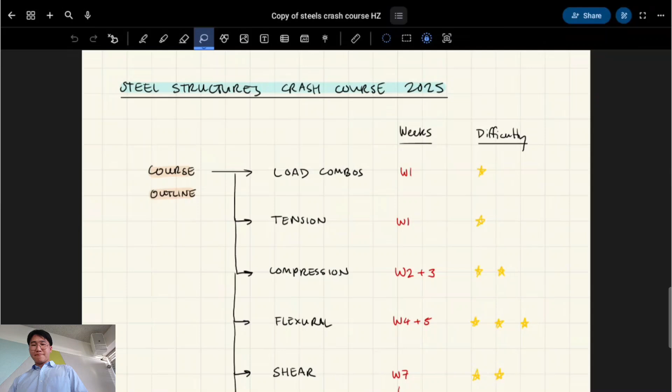So what tends to happen is you spend about half of the first week - oh hi Vina - doing load combos, which I assume most of you guys, since this is your first structural design course.

So structural design courses - steels and concrete - come in term 2. They generally come up in third year, but I convinced a couple of people to take concrete in second year, just because second year is filled with a lot of courses that are really abstract and don't really convince you that civil engineering is a fun degree. But trust me, these structural courses, once you do them - steels, concrete - you really start to get into them, at least if you're me or whatever. But hopefully I can convince you today.

So load combos - basically the point is, in Australia and New Zealand we use something called load combos, which we'll cover a little bit. How do I say it in a non-overcomplicated way - it's just a way of exaggerating forces and stuff you'll see in real life for worst case scenario design. There's something called strength design, so basically: how far can we push this building before it collapses? Essentially that's what load combos are about.

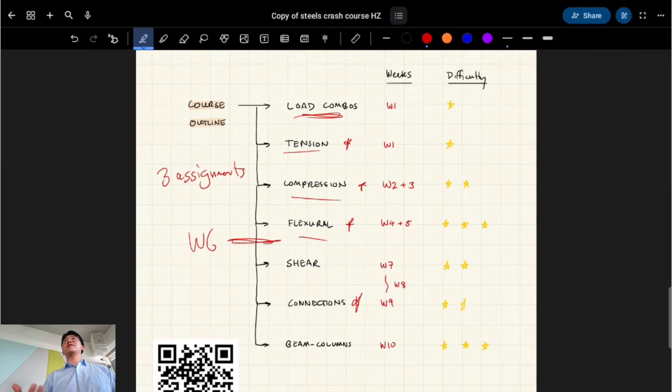Generally people do pretty well in the pre-exam stuff, which is the assignments. But once we get around to doing the final exam - Brian's final exam I heard was decently easy, but I feel like it's going to be a bit harder this year because final exams shouldn't be as easy as he made it last year.

Anyway, does anyone have any questions right off the bat?

Okay, if not, there are 2 bits of required reading for this course - 2 documents essentially. The first one's the Australian standards.

When you start reaching this part of your degree - actually, it's mainly just for the structural courses - we go off the Australian standards, or sometimes the Australian New Zealand standards, AS New Zealand 1170. There's decimal points, so there's 0 and 0.1.

This is basically everything to do with your loading. You won't really have to have a good look at these standards because they're just going to be covered really in depth in the lectures. Everything you need to know that's relevant to the course will be in the lectures for this.

But this is part of load combos and everything - this is where load combos come from. This is generic to all the materials, so even for concrete, you go back and use these.

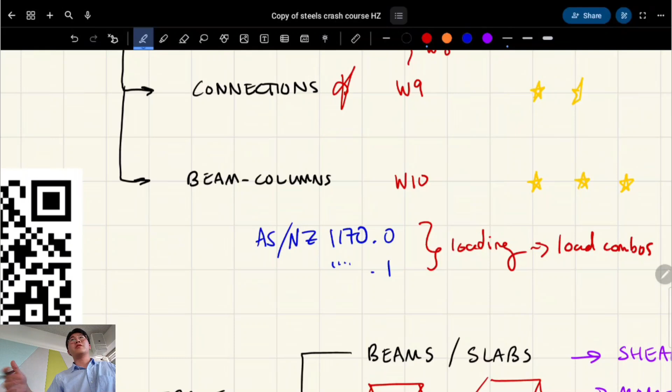The other one that's specific to steel is AS 4100, the steel structures standard for Australia, and that's what the whole course is based on. So everything else basically in this course you can find in this book - that's required reading essentially.

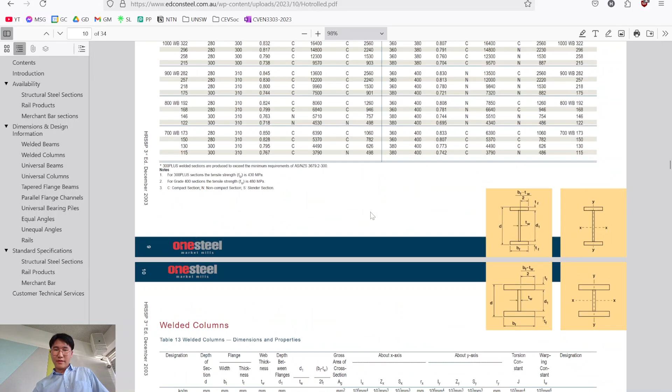Let's go to, this is a universal beam for example - it shows you on the top right what the product would look like, and has different sizes for the products. This looks confusing right now since it's your first time seeing it, but it's fairly easy to follow, and it'll save you so much time because you won't have to manually calculate every cross-sectional property. You just look at the catalog, find the number, and you're set. It has a bunch of stuff on here, it's really easy.

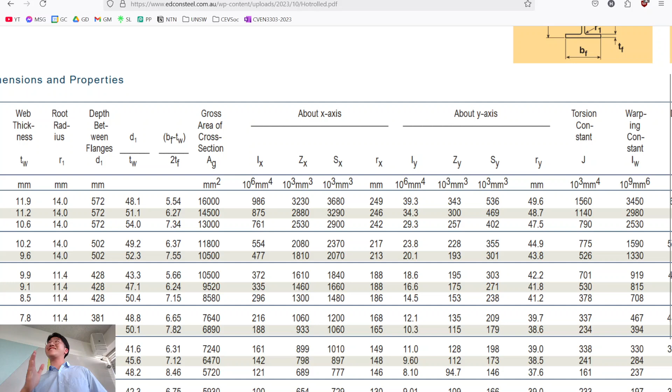Yeah, oh my computer's lagging. Oh no, I hope it doesn't crash or something. Is my recording still working? Oh boy, what the... it's kind of been... oh okay, no, it works. It works, let's go back to this. Oh man, okay give me a minute to fix this. Oh no, jokes, this way. Okay, come on man.

Okay, before we move on, does anyone else have any questions? That's just like the preface, you know. I've just gone over the preface so far.

Let's talk about structures. So essentially, there's a few different ways of thinking about structures. In uni, we learn about pretty idealized systems - we learn about frame systems and truss systems, essentially, right? This goes all the way back to like 1300, essentially.

Within a frame system, you can have 2D frames, you can have 3D frames. They're essentially the ones drawn kind of like this. You have pins - you can have rigid supports if you want, but you have rigid connections between the members generally, and actually the frames might look like this even. These are all rigidly connected unless there's a circle there and there's a pin. So it's things like that - that's like a frame, basically.

And then within the frame, you'll have different elements - you'll have beams, you'll have slabs, you'll have columns, you'll have walls. But we probably won't talk about slabs or walls at all in this course. You'll talk about it a little bit, like slabs specifically in concrete, but we effectively just have to focus on the beams and columns, so we're just thinking of those as one-dimensional kind of members or elements. When you start thinking about slabs and walls, they're two-dimensional, essentially.

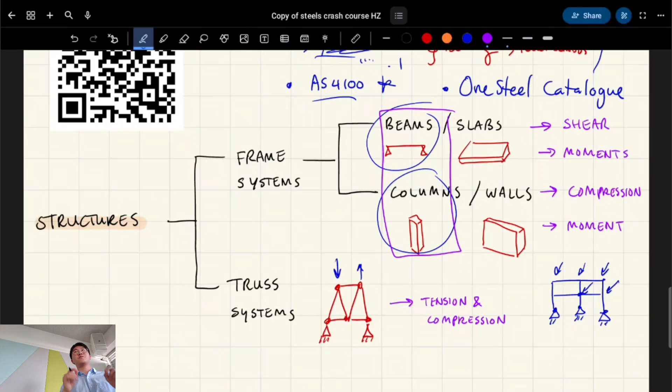For example, my elbow is a pinned joint - it can essentially rotate, so it's like connecting these two members and then it's free to rotate like that. That's pinned, essentially. So trusses have to be pinned - I've drawn them as circles here. They have to be pinned at every node, essentially, including the support. So you can't have a rigid connection for a truss - that doesn't work. And the idea is that trusses, ideally, you want them to only take on axial tension and compression.

Tension is when you pull something apart, right? Let me get this back - split it out. Yep, so tension is like this. Compression is squashing it together, essentially. I'll whip out the Play-Doh again later, because when we factor in material properties and stuff, there's a lot of nuances to these seemingly simple forces. So that's tension, and compression is going inwards, like that.

So you'll find that in truss elements, essentially, because of the way that the loads go onto the nodes, and then the nodes are pinned, essentially. Okay, does anyone have any questions right now? With frame systems, I should have mentioned here, sorry.

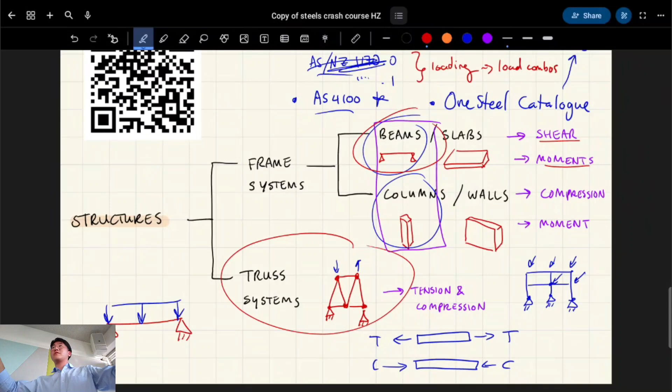Does that give you guys a good overview of what's going on? Let me know if I'm going too slow. I can speed up if you guys already know this, or slow down if I'm going too fast.

So like Henry, shut the fuck up. Get on with it. All right.

So if we have 3 tradies, and say they weigh 100 kilos each - quite heavy - if our structure, the scaffolding, can only support 300 kilograms, do you think that's going to be an issue? Yeah? Why is that? Perfect, so that's what this expression is about.

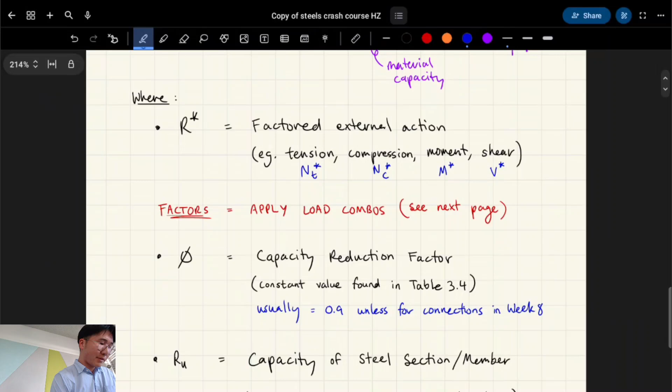There's a bunch of notation you're going to see in this course, so get familiar with it. R is kind of a generic expression - you don't see it too much in this course, but when I say R it could mean all kinds of letters: NT, NC, M, or V.

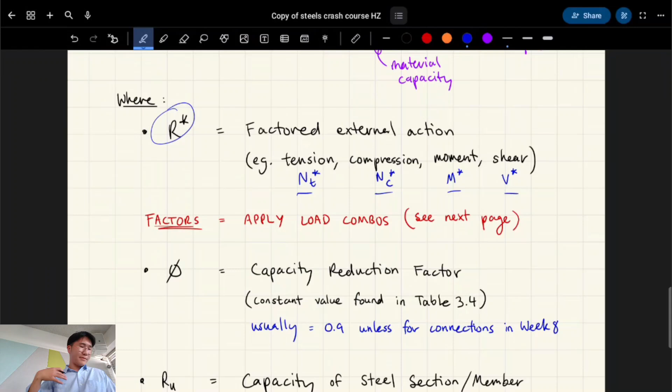Yeah, so anyway, there's a bunch of letters there for tension, compression, moment, shear, whatever. Yeah, I've explained that, okay.

So in this course, generally you're going to find two types of questions presented to you. The first one is about whether the capacity equation is satisfied, which means is the left-hand side, the external loads, less than the right-hand side, which is the material capacity. That's the first type of question. It's a simple yes/no question, like a true/false kind of thing.

In order to prove this, you have to prove the left-hand side. So you do all your load factors, which I just ran over, and then you also do the right-hand side. The right-hand side is a lot more complicated than it looks, because that's where all the steps come from. That's basically the entirety of AS 4100, the steel standards. It's about telling you what RU is based on the type of thing you're designing for, like tension, compression, moments, whatever.

That's the first type of question. So the second type, which is a bit more nuanced, is about iterations. It's based on the loading which I'm giving you - how big does my section need to be? When I say section, I'm talking about the cross section of a steel beam. How big does that section have to be in order to resist the loads? Like what's the smallest section I can get away with?

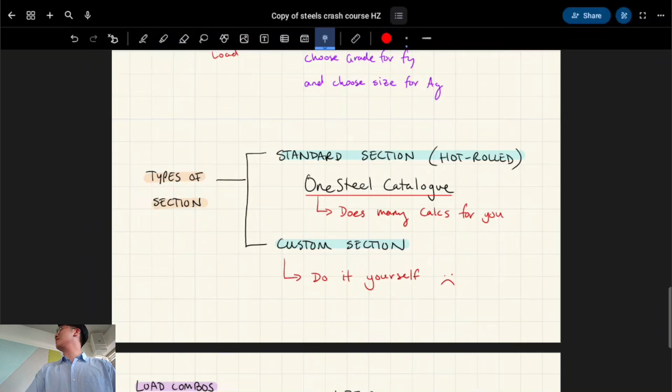So it's things like the second moment of area, elastic section modulus, plastic section modulus. If these words don't even sound like words to you, that's okay - we can go along, and you can always ask me questions even after the workshop. But yeah, custom sections are harder, they take longer, and you're not really expected to do custom sections in your finals because it takes too long, unless you're me, because in my year... anyway, sorry, it's fucking hard, isn't it?

So, load combinations, right?

This might not mean anything to you right now, but this is what is in AS1170.1. I won't cover this too much because you're going to learn it as your first topic in your first week, and I think Brian will do a good job explaining it to you.

Essentially, the thing you have to get familiar with is that we start talking about loads a little bit differently now that we're doing steel and concrete and real life design subjects. So G is known as your dead load, and Q is known as your live load. You also see other ones, like W for wind load. But more commonly it's just dead and live load.

The idea is that dead loads are things which aren't going to be moved for like 100 years, essentially - they're called permanent loads. Live loads are things which would move over the course of a day, a year, the shorter term loading. This is really important because, especially for serviceability, which isn't really covered in this course, how long something's been there makes a big difference on the deflection of the structure - how much it's going to sag over time.

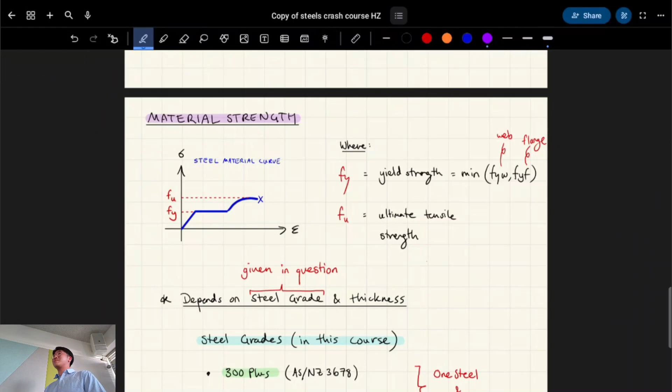Okay, so we need to start talking about material properties, because so far we've just been talking about the left-hand side - so load combos and everything is just the left-hand side of this equation. It usually doesn't take as long as the right-hand side. So all we've done is exaggerated our forces that are going to be applied to our building or whatever. Now we're going to be talking about the right-hand side, and the first step in understanding that is material strength.

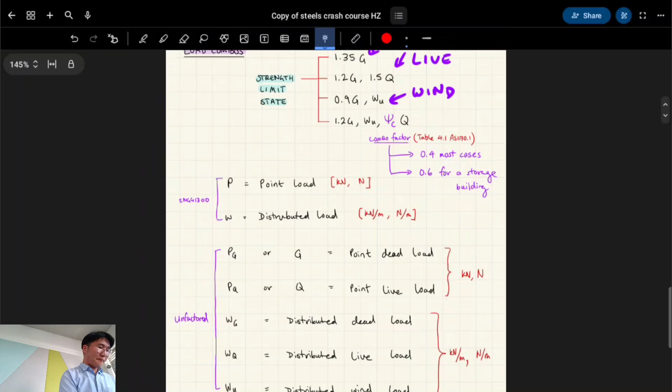Specifically, here's what it looks like for steel. These are your exaggeration factors, essentially, for your loads. There's a few different cases. 1.35G means that, in the first loading case, you just consider the dead loads - the things that are going to be there for 100 years - and then you add on 35% of it.

That's worst case scenario number one. Worst case scenario number two is we'll consider the dead and live loads acting together now. That's taking your dead loads again, exaggerating it by 20%, and then getting your live loads and exaggerating it by 50%. The reason why this is higher is because live loads can vary more.

For example, I think it was the Golden Gate Bridge or something - there was a day where everyone was celebrating its 50 years, and they all stood on the bridge. Fuck, you want the bridge to break or something? What are you doing? But that's an example of why live loads are more volatile, and so this loading case is exaggerated a bit more than the dead load only one.

So you check the worst case scenario between the two of them, and what you do is take the worst number, the maximum between those - and there's other ones to consider too. So between all of the ones you should consider, check the worst case scenario essentially. Make sense?

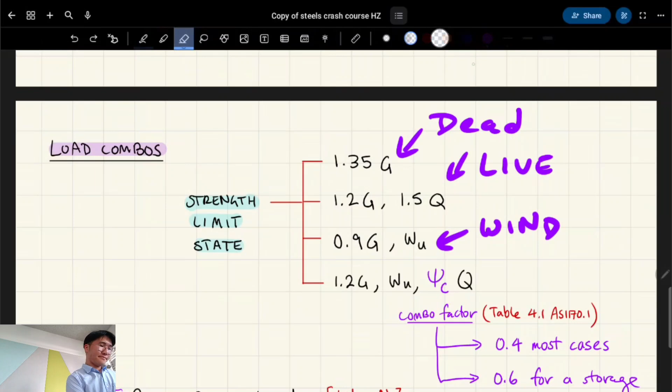Does anyone else have any questions?

All right, so we'll move on to the right-hand side now. That's capacity. The first step in understanding is material strength, and this is specifically for steel. So the good news about this course is you only have to think about one material. In the next course, concrete, you have to think about multiple, because concrete is reinforced with steel as well, so the interaction of those materials is really what does your head in.

But here we just have steel, and steel's going back to - have you guys done Material Science 1101? Yeah, some of you have, I think. Isn't it required now? I think maybe most of you guys have. Oh wait, one of them - oh yeah, because there might be some 4th years here, right? Is that right? Okay, yeah, okay, so I'm just trying to adjust how I explain this then.

Essentially, material curves you might have seen a little bit of in solid mechanics, but they become pretty important as you go along in structural courses. This is a stress-strain diagram, so stress on the y-axis, strain on the x-axis, and stress is essentially analogous to a force, and then strain is analogous to displacement. That's the very basics of it.

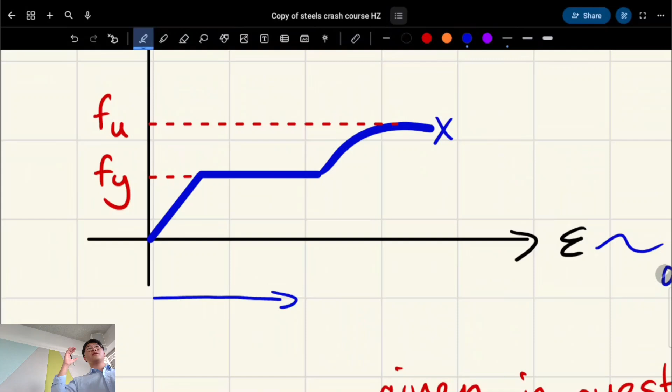So as you apply more force, you should think of it in terms of the x-axis. As you apply more displacement, there's this region that's linear at the start, and then it plateaus - it's not taking on any more force, essentially. And this is specifically for steel. So does anyone want to have a crack at why that happens?

I like it, okay let me repeat that. So this first stage, steel behaves elastically - this is the elastic region. That means, so if I had an elastic band or something and I'm stretching it and then I let go, it's going to return to the exact same shape that I started with, hence the name. So that's elastic behavior, where there's no permanent deformation, essentially. Steel does that for a little bit.

And then it plateaus - so why do you guys reckon it might plateau? What's happened in the steel? Because it goes into the plastic region, and then when you stretch more and more of it, it gets more plastic the more you go. Yes, there's a word I'm looking for - strain? Necking? Yeah, that's the result of it, but what's the steel doing? Yes, perfect - it's yielding. So that's the word we're using here.

Alright, this is the yield strength of steel. Play-Doh - why I have Play-Doh is because it's basically a perfectly plastic material. This deforms as soon as I put any forces on it, and permanently. So this is essentially what steel does: as you apply more strain to it, it starts necking, like you said, but we call this yielding. So yeah, anyway, does that kind of make sense?

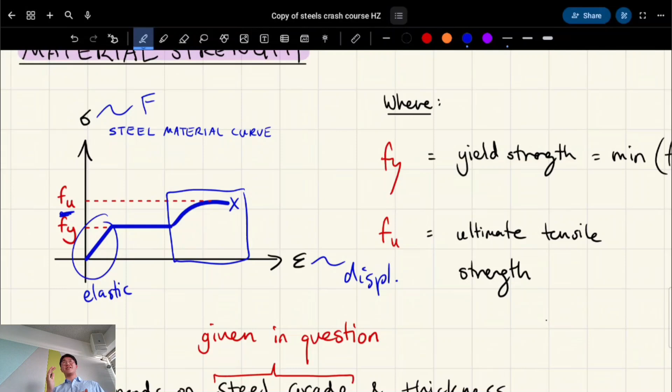So essentially, with metals, do you guys remember chemistry and stuff? If you haven't done material science, you have a metallic lattice, right? These little ions that are connected to each other, a sea of electrons, all that, right? So the idea is that, let's just talk about tension, as you pull these apart, they're going to dislocate. But then the dislocations start impeding on the other dislocations. And so they're actually resisting their own dislocating, if that makes sense.

But then there's eventually a point where it just breaks. It doesn't want to take any more, essentially. But this is called work hardening. And it happens in steel, aluminum, aluminium. Sorry, I don't know why I became American for a second. Okay, but yeah, does that kind of make sense?

And so you reach this point called FU, pardon my French, and that's the ultimate tensile strength. You only really talk about this property for the tension part of the course. Yeah. Most of the design in the course is based on the yielding failure. Yeah. So we'll talk about that a bit more later. Okay.

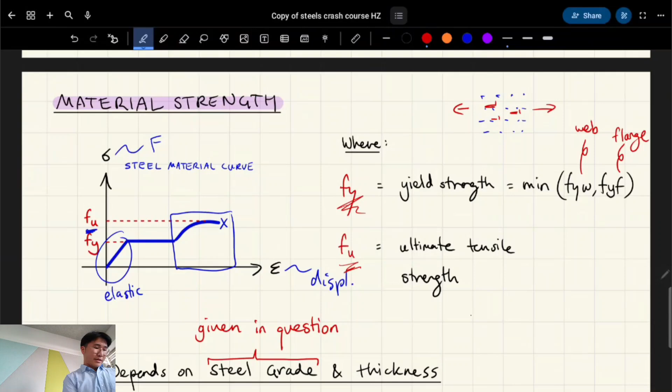Okay, so next, steel grades. So steel grades are essentially to do with how strong they are in terms of material strength, how expensive it is to produce, things like that, right? So there's a few grades you'll see in this course. 300 plus and grade 350 is what you'll see a lot in OneSteel and in the tables and stuff. So if it says we're designing a 300 plus steel section, whatever, it means that's what you should look at. So if the question gives you that, that's what you should be looking at in OneSteel.

Like you go to the column which says 300 plus. It's kind of hard to explain. It's like going back to the Lego analogy for OneSteel, right? It's like, okay, the Legos are 300 plus, and then the Lego off brands, that's like grade 350 or something. I don't know. Basically, they're slightly different, essentially. They have different properties. Make sense?

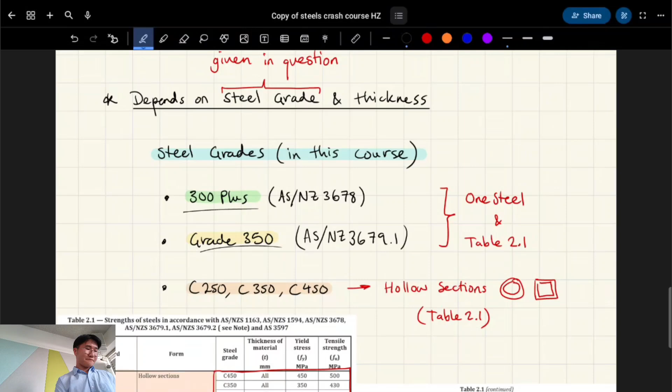Yeah. And then also there's a separate grading system for hollow sections. When I say hollow sections, we're talking about pipe shapes, right? So hollow circular sections, hollow square sections, things like that, rectangular sections. Yeah, they have a different grading system. Yeah, you can look at this in more detail later.

Okay, tension design. Sorry, we're finally here. This is the first week's topic that isn't load combinations, but I'll give you all that background because it helps for when I'm just talking about this stuff, essentially, right? So left-hand side, this is essentially truss design because you're not really going to find tension in non-truss structures so much, right? So just for the tension members and trusses.

The left-hand side here is going to be external forces. So what generally happens is you're given a problem where either you're given just design for this much tensile strength, or you'll be given an actual truss. So you have to use all your truss methods, like method of sections, method of joints, solve it, and find the worst case scenario for tension, and then design the tension member around that, like how big the steel section should be or whatever, right? Kind of makes sense? Yeah.

Okay, but then the right-hand side is obviously where there's nuances. The capacity factor in this course is actually really easy. So if you've done concrete, capacity factor depends on so many things. It depends on the ductility of your reinforced concrete and things like that. In steels, it's super easy. It's 0.9 for almost everything except for connections and maybe shear. But 0.9, that's the number we reduce, like under-exaggerate our strength by. Make sense? Oh, capacity.

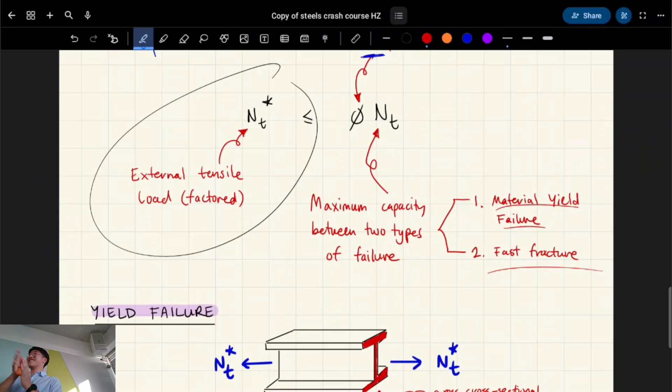Okay, I'll give you the answer. That's yield failure, we kind of understand that theoretically, right? Let's go to fast fracture.

If we have bolts running through our steel section, there's holes. Essentially there's going to be holes in our section because we need to use it to connect to another steel member. Why do you think the holes might cause fast fracture?

Yes, pretty much, so it's kind of to do with how - these will be kind of like the new cross sections. Do you see how it's a bit smaller than our old cross section? The same amount of force has to go through less cross section, right? And also it's partially to do with...

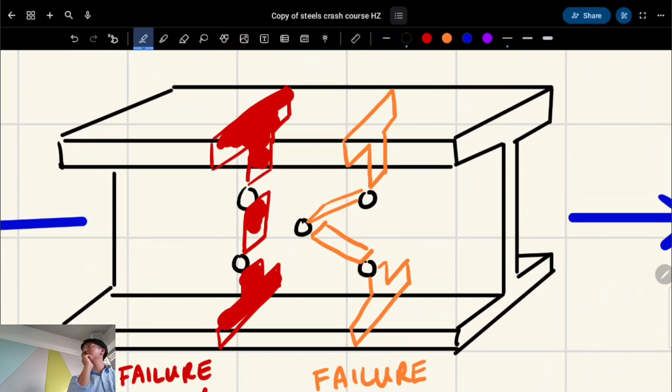Load, it's kind of like that - like how the loads are distributed within the cross section, because more loads will have to flow that way, and whatever. Do you know what I mean?

Yeah, I think in MATS1101 the very first experiment we do is a tensile test where there's a crack in our Perspex or whatever tensile specimen, and the idea is that it shows cracks will propagate fast fracture, right? So these are essentially cracks - the holes act like cracks and reduce the area and everything like that.

Okay, let's quickly have a look at the formulas involved. So for yield failure it's actually quite straightforward. Do you guys remember the general force equation? Sorry, I should say stress equation - what is stress?

Very good, so stress is force over area, right? What if we wanted to rearrange that for force? That's essentially what this is - let's do that.

So the force that we're calculating is going to be the product of your gross area. Gross area is area without holes, so it's the cross-sectional area, multiplied by yield strength. Yield strength is the limit of the stress which our section can take, so that's why we do F instead of sigma for the general stress expression.

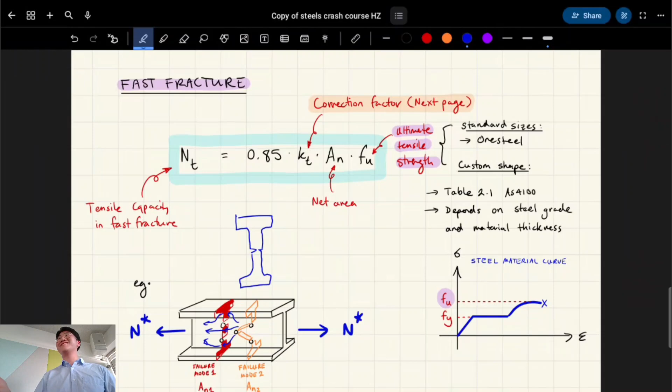This is where it gets complicated, right? So imagine you have a section that looks like this, and you have this grid-like pattern of bolts. There's multiple fracture paths - we call them failure modes - that can happen.

So there's one where the holes are not staggered, and then there's one where the holes are staggered. So which one do you guys reckon will be stronger?

Kind of getting both answers. Number 2, did I say weaker or stronger? So you reckon 2 is stronger, but why do you reckon that? There is more surface area. However, the holes remove surface area, right?

That's true, so that's why we have to check, because it depends. It depends on how long the path is, and how big the holes are. So it's a push and pull, right? And so we have to find the net area that's smaller, and the lower one, right?

Like the weaker one. Vina, are you okay? Does that make sense? Okay, alright, yeah, the one that has less area will be the more critical one. That's what we had to design around, right?

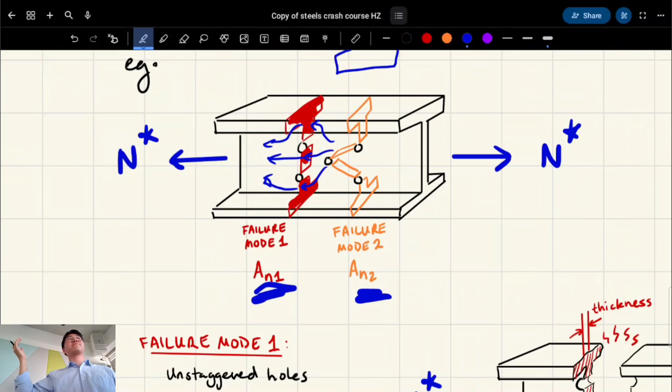And then even between that, we have to consider both fast fracture failure and yield failure, and the lesser of the two will govern. The worst case scenario, the weakest one, will be what causes it to fail. Does that kind of make sense, guys?

This 0.85 is like a brittle reduction factor, because it's like a brittle type of failure. It just happens suddenly. Yeah, sorry, yeah.

Pretty much, yeah, because otherwise, definitely just do both anyway. But I'm pretty sure fast fracture will only govern if... because we're going to be using FU for this one, so it's going to be a higher strength, do you know what I mean? So the only reason why it would ever fail before yield failure is if there's holes.

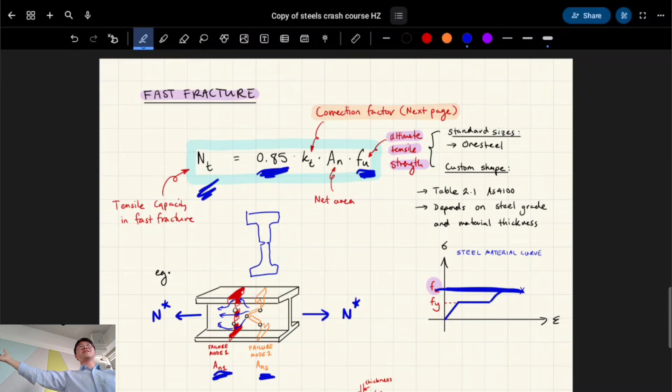Yeah, it makes sense, because the holes will reduce it. That's why we have to check for everything, because everything's a push and pull. So sometimes you're going to be using a net area, but then a higher strength. But sometimes you're going to be using the gross area, but using the lower strength. Makes sense? So we check for everything.

So in that graph, yeah, this one on the right. Which progression would fail - fast fracture? So go through the elastic and the flat phase. Where would it fail exactly?

Oh yeah, so on this slightly-not-drawn-to-scale graph, that's for fast fracture, yes, but it's going through all the yield stuff. Yeah, I see what you mean. I think the idea is like, basically once you get enough yield failure, it will just fracture as well - like the fast fracture failure mode.

But what makes it fast fracture? If it's going through the yield, wouldn't that be like it's a yield failure? Reaching the yield strength doesn't necessarily mean yield failure.

Yield failure kind of happens because it's like basically one mode of failure will show a bit of yielding, but the other one will happen so quickly and it'll be brittle that it's fast. Does that make sense? Like, yeah.

So reaching this yielding point, there is a limit of how much of that is acceptable, because at a certain point the structure will just suddenly break as well. So one will give a bit more before breaking, and one will just break suddenly. But they're both considered failed in the standards, right?

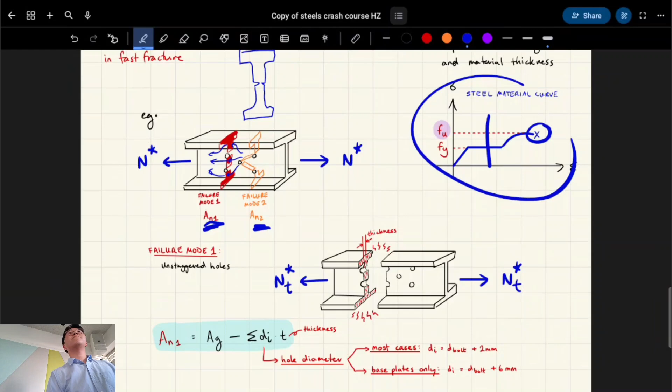Can you provide an example when An2 would be smaller than An1? Oh, you're talking about An? Yeah. You're talking about when An2 would be smaller? Yeah.

I would say if the holes are quite big and the fracture path isn't very big, do you know what I mean? So this is a really exaggerated example, but do you see how the diagonalness doesn't offset the amount of holes? Yeah, okay, is that satisfactory, Lucky? Okay, alright, yeah, go have a stretch or grab some water or whatever.

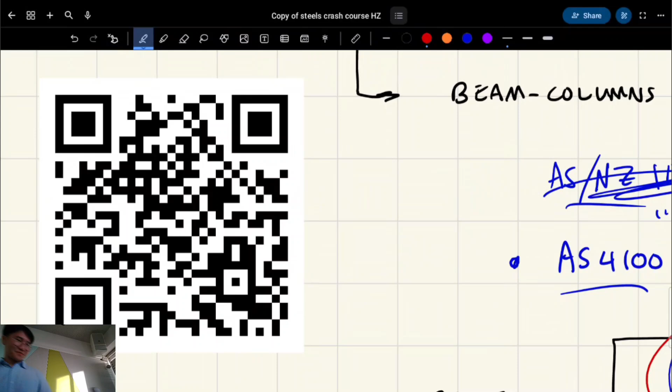Alright, for context, the stars are the difficulty of how I rated everything. So what we just covered is like 1 star difficulty, I'd say. Next week, after the break, compression is 2 star difficulty. Flexure is one of the hardest topics, that's 3-star difficulty. Then shear is a little easier, and connections is even a little easier. Beam columns is pretty hard, because beam columns is just everything, basically.

Yeah, so yeah. I think it was unlimited when I did it, but I don't know if it still will be. But there's so much stuff you have to reference - there's the standards, there's OneSteel catalog. It's really hard to only bring one page, it'd basically be impossible.

For geotech, they gave us the standards. Oh yeah, like the standard booklet. Really? Yeah, oh crap. Nice, they gave it to us at the start of the term. Not bad then. Oh, I know what you mean, you're talking about the applied geotech notes. Yeah, those are really good. But this one I think you have to just print, you have to chop down a whole tree for your finals.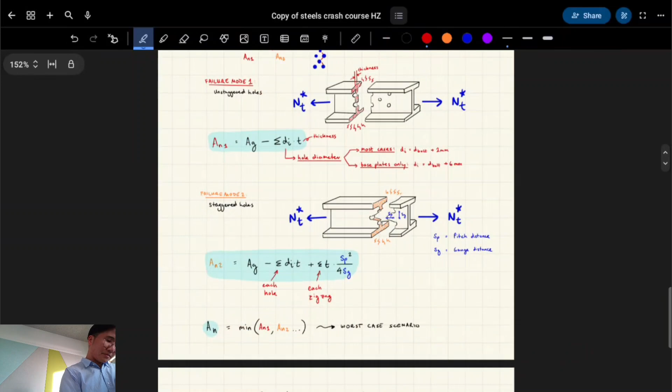Sorry, I want to talk about one more thing. This is still to do with tension design. KT, right, this is called the correction factor. And this is to do with - have you guys heard of eccentricities? Probably not, you talk about it a lot in geotech. Is anyone else doing geotech this time? Okay, you'll hear about eccentricities a lot in the second half.

Let me get up a good diagram. So basically, imagine you have an I-beam like this, right? And then we're doing tension, so it's being pulled apart. So where's the force going to be located, where's the center of the force? In the middle, right? So this is essentially KT is equal to 1, there's no eccentricity. Got it?

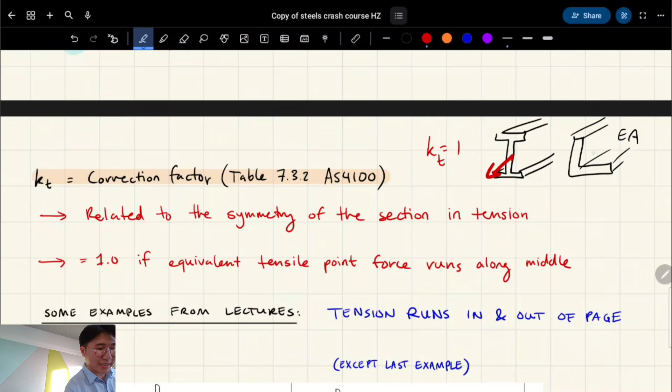What about if we have something called an equal angle? This is a steel product called an equal angle, and there's unequal angles as well. These are more L-shaped, where the two bits coming off of it are unequal in length. But equal angles, that's just an example. Where is the force? Is it in the very middle in terms of B onto D? No, right? It'd probably be like so, that's B onto D. The force average or whatever might be there. Actually no, that's probably wrong. It's probably somewhere on the actual steel member, right?

So that offset is called an eccentricity. Eccentricity is just another way of saying an offset of the force. That is going to change your correction factor. There's a bunch of rules to do with it on the lecture slides. You can have a good read of that, but it's just to do with whether the force is applied in the middle or not, essentially, for tension. And the correction factor is only in fast fracture - I can't tell you why.

If you think of a truss member, like in 1300 level courses, we just think of it as a straight line, a one-dimensional object. So the tension's just running right through the middle. But with steel, we start thinking of things in 3 dimensions.

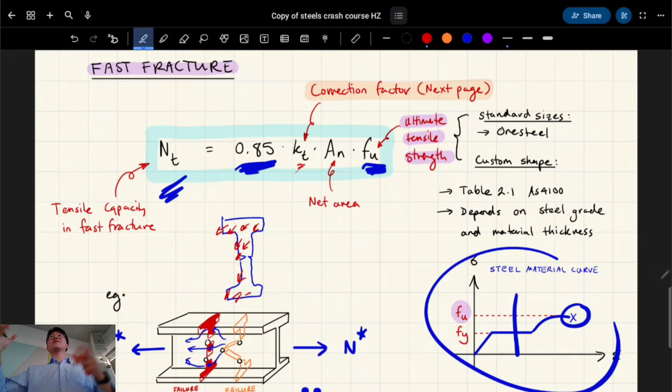Essentially, you think of the tension like more of a stress rather than a force, so it's kind of like a bunch of little arrows. Just pretend that's an I-beam - I know it's something else, but do you know what I mean? It's like a bunch of mini arrows everywhere pulling it, and the average of that is where the force is going to be located.

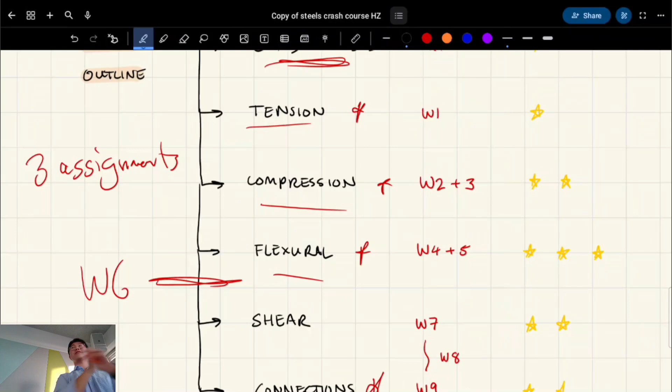Okay, you guys ready to move on to buckling? So the next 2 topics - let me give you an idea of how big these topics are. Compression takes 2 weeks, flexure takes 2 weeks, and buckling has to do with both. So buckling covers like half the course, essentially. This is one of the most important concepts to keep in mind.

This isn't going to be the best example. Does anyone have a ruler or something I can use? Okay, pretend there's a ruler. If I squish down on it, that's compression - that might be like compression loads acting on a column, for example.

Is it going to perfectly squish up based on this shape? What's going to happen to it? Is there going to be any eccentricities? Yeah? So why is that? Our column is going to buckle. So buckling is where it goes off its center as you squish down on it. That's the general concept.

What happens is if we have a shorter column, for example, and I push down on it, it does stay in the same line of action. So buckling is a function of how long your member is - the skinnier it is, so length divided by width, essentially. This is like slender - this slender column might be classified as this, while a stubby column is one where the length to width ratio is smaller. Slender columns are really susceptible to buckling. That's the general idea.

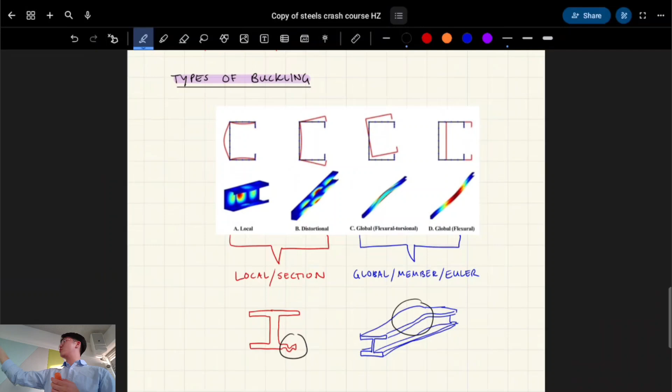The thing is, there's different types of buckling. A couple of you guys have done concrete, and concrete doesn't really focus on buckling - never mind. Basically, there's two types of buckling: local, or sometimes called section buckling, and global, sometimes called member buckling or Euler buckling.

Do you see these diagrams? Pay attention to them - why do you think they're different? Is the global one over the whole beam, the whole section? Yes, perfect. And the local one is just, like in that example, within the cross section, right? So it's a different axis we're looking at.

So in concrete, say you have a concrete column - pretend that's a concrete column. Generally they're shapes like this, rectangles and things like that. They're not really susceptible to local buckling; you only really consider the Euler buckling or global buckling along its whole length. But for steel, because steel members are generally pretty thin and slender, like the one you can see there, they can sometimes buckle within the section.

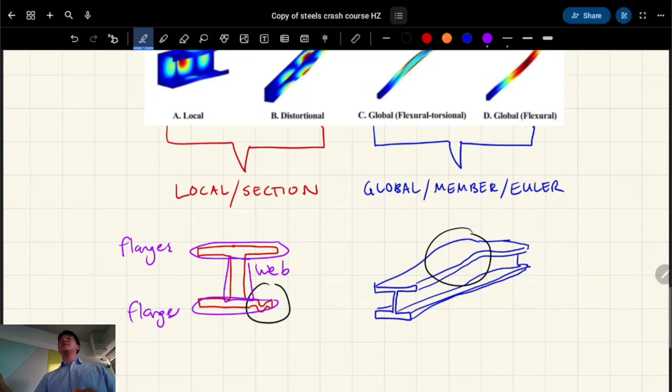I should probably tell you guys what parts of the section are called and how they're classified, because I forgot to mention that. So we have this and this - these are called flanges, and this is called the web. That's just terminology. It's actually based on the width - so when I say width, I'm talking about this dimension.

So flanges have a higher width, like it's the wider one, and webs are the thinner ones, generally more in the depth direction, right? That's just terminology. So do you guys reckon that flanges or webs are more susceptible to buckling in general?

Web. You sure? Say they're the same thickness. Like why do you say that? Just want to see your thought process, like in terms of what's the loading case?

So compression. It's similar to what we saw before, but it's being pushed together. So stresses are being applied like little arrows throughout the entire thing, right? Like along the y-axis or the x-axis? Axially. So like that.

Oh, I see what you were trying to say. Yeah, that's you're kind of thinking about flexure. So that's to do with bending. Right now we're just thinking about axial compression.

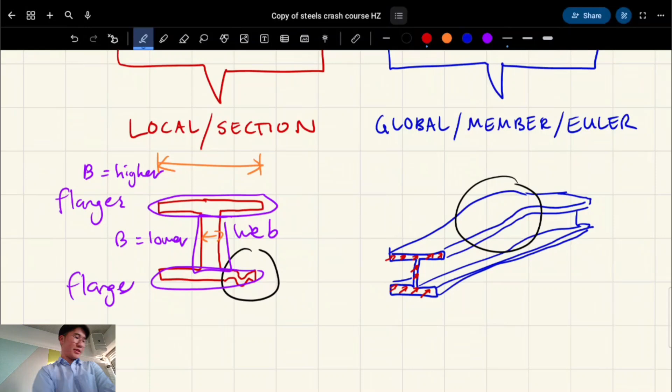Not really. Okay, are there certain regions where it's more susceptible? Yeah, so like at the end of the flange. Yeah, so why? It's because it's not supported. Exactly. So here, where there's an interface between a web and a flange, we consider it can't buckle.

The further away you get from that point, the more susceptible it is to buckling. Does that make sense? And for the web, sometimes the middle of the web can buckle, but it's supported from both edges, so it has rigidity on both sides. Most likely it's from the tip of the flange where buckling happens. Make sense? That's the logic you want to follow.

Does anyone have any questions on that? That was to do with section buckling, like the individual elements within the cross section. So what I said before was buckling is a function of your length divided by your width or whatever, but that's actually slightly incorrect.

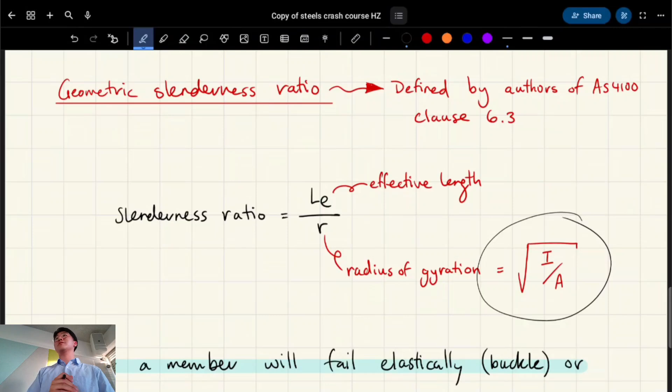It's actually to do with effective length over radius of gyration. Radius of gyration is that random section property which you don't even think about and don't know what it's used for. It's used for the slenderness ratio — it's the square root of your moment of inertia divided by area, essentially. Effective length we'll talk about later.

I see people copying this down, so I'll give you a few more seconds. Radius of gyration, is it just like, because it's from the centroid? Yep. And what does it mean by radius of gyration? Does it mean the distance at which it's actually the maximum? Shit, how do I explain this?

I've never found a good way to explain radius of gyration other than just looking at the formula for long enough. But like, say you have an I-beam, and pretend it's like a literal radius, and it'll stay confined within that circle. Not really confined, it's more like kind of... so do you know how I said before,

slenderness is to do with the length to width ratio? Radius of gyration is kind of like a standardized width, but for your section. Does that make sense? It's not very accurate to say, but you can pretend we're treating that I-beam or I-column as kind of a circular cross-section, and consider the buckling based on that slenderness. Does that make sense? It only kind of makes sense to me as well, so yeah.

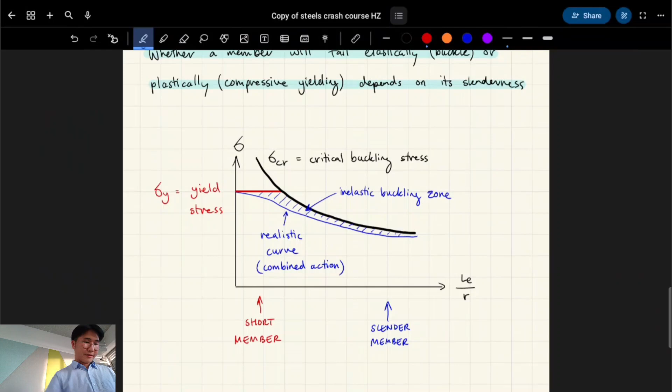Last thing, I'll quickly talk about form factor. This is essentially what we were talking about with the section thing - the parts which will locally buckle and the parts which won't. We're going to consider it in terms of effective area.

So I'll give you a quick pop quiz. If our members were thicker, are they more or less susceptible to buckling? Like the flange and the web, if they're a bit thicker? Yeah, exactly - you're kind of considering this length-to-thickness ratio, but for every individual element on your section as well. Make sense?

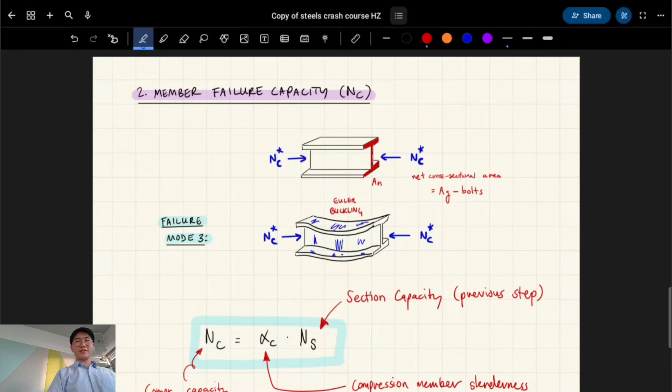Okay, and then member failure - Euler global failure, basically. That's the one where it bends like that, right?

The thing is, to calculate this, you have to calculate the section first. So you always do the section failure first - the compressive section capacity - before you do the global one, because the formula is dependent on it.

So the end goal is to find this thing called the compression member slenderness reduction factor. And here's where you just go down a rabbit hole of folders within folders, so to speak, of formulas to follow. You got this one from the previous step, which is the capacity.

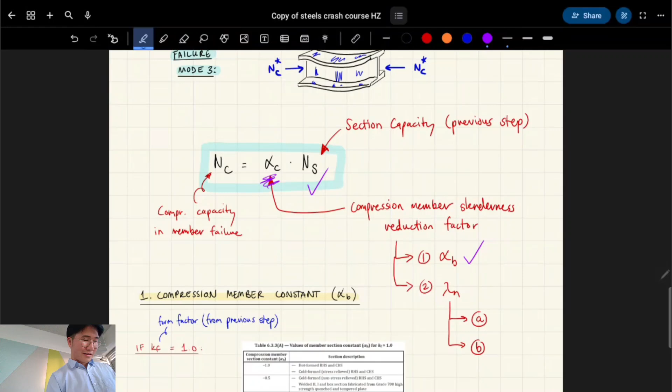And in order to find alpha C, you have to find alpha B, and you have to find lambda N. Lambda N has two other components which I forgot to copy over, but you'll see them. So it's kind of like a rabbit hole - you're just trying to find little bits and bobs, and when you have these two, you can get this one too, essentially.

It will be in the workshop questions, it'll be in the exam, it'll be in your assignment, yeah. Because you said it takes a while - oh yeah, sorry, I should also mention this one.

KF takes the longest to find for a custom section, but that's only if it's a custom section. If it's on OneSteel, it gives you KF - it'll tell you KF is 1, which means none of the individual elements will buckle, or if it's less than 1, it'll tell you the KF you need to plug in. So it's really easy - it's just when you have a custom section, you need to fine tune it, it takes ages, basically, and there's a bunch of rules for it and stuff.

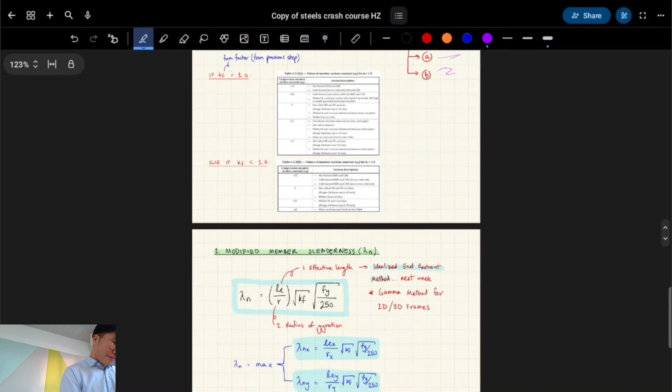So basically, we're looking for a bunch of things: number 1, alpha B, and number 2, lambda N. Alpha B is not bad, it's from a table, and most of the time you're going to be dealing with hot rolled UB and UC sections. UB stands for universal beam, just another way of saying I-beam, I-shaped beam. UC is universal column, like an I-shaped column, basically.

Hot rolled is anything you can find on OneSteel - everything on OneSteel is considered hot rolled, and that's just the way it's manufactured, essentially. Make sense? Yeah.

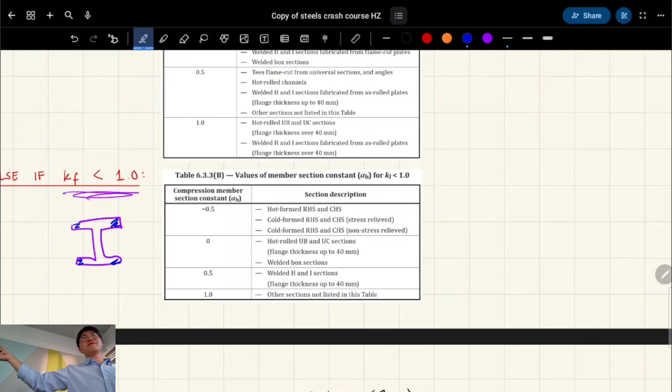If KF is less than 1, so if parts of it are ineffective - like say that's ineffective, that's ineffective, that's ineffective - you just follow a different table, but it's based on classification, essentially.

Lambda N, modified member slenderness, is going to depend on 2 sub-factors - sorry, I forgot to write them above. The first one's effective length, okay, so we're going to talk about that. And then the second one is radius of gyration.

So here's where we're getting into that buckling theory. Basically, effective length is the length multiplied by some kind of factor - so LE is K times L. So say your compressive member, let's say a column, it has a certain length, right, like that.

So the things which this factor depends on—do you guys want to guess what this K factor depends on? What do you think changes the effective length, aka how much something would buckle? Don't think about material properties right now, and we're not really thinking about the cross section. We're talking about the entire length of the member and how much of it we'll consider in our length. That's effective length, essentially.

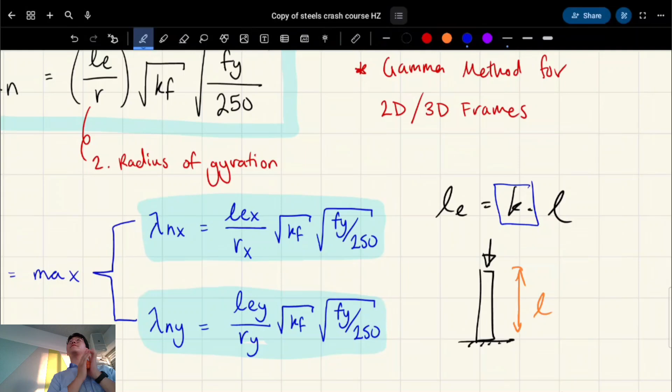Think of a frame like this, okay? And think of it taking on lateral loading, say from wind or something like that. What's gonna happen to this frame by itself? Sway—that's the word I'm looking for. That's called a sway frame. What happens if we do this? It's going to be stable, against wind and lateral loads, right? That's called a braced frame. Those are the two types. And that will heavily affect the effective length of buckling, okay?

The second thing to consider is, like you said, the end restraints, or how it's connected essentially. So there's fixed connections, there's pin connections—those are the ones we consider essentially. Oh, and free, I think. Oh no, that's still pinned. Okay.

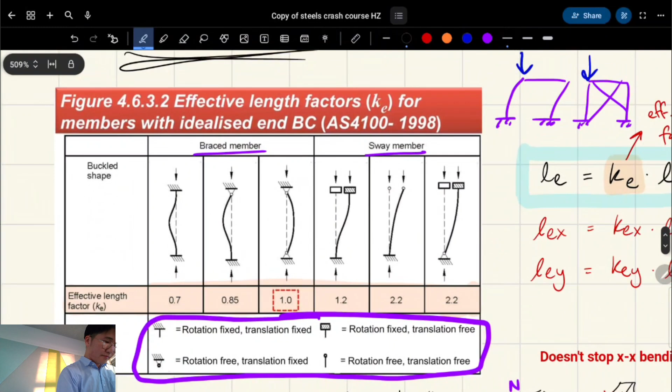So these numbers, some of them are higher and some of them are lower, right? The best way that I thought of explaining what K is: the size of the C shape you can see on the diagram. Does that make sense? So if that's the length here, L, our K is what percentage of it is the C shape. So for the first one, what percentage would you say is a C shape? 70%? Right, so that's 70% of that is your C shape.

Okay, the next one—pinned at the top and rigid at the bottom—85% of that is C shaped. There's 100% of it is C shaped essentially, right? So here's where the L is equal to your effective length as well.

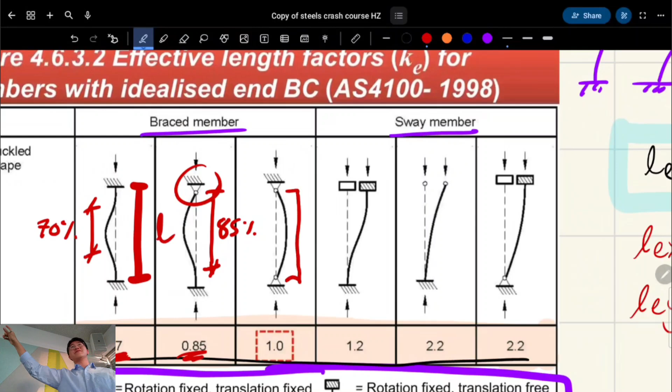Okay, what about the sway members? These ones are bigger. So how much of this is your C shape? The C shape goes off the page—do you see how that happens? For sway frames, this one's C shape is like that, and this one's C shape is also like that. That's kind of how they got these numbers.

So what happens when you have a longer length? Is it more or less susceptible to buckling? What happens when you multiply your length by 2.2, and it becomes 2.2 times more? Exactly—it's as if your column is fucking massive, because it's really, really susceptible to buckling if it's a sway member. Does that make sense? Yeah.

So that means sway members might be longer—they're effectively longer. You pretend that they're longer in your calculations than they actually are, and you exaggerate them to be worse than they actually are. Whereas braced members, they're braced so they don't move as much, and parts of it are, for example, fixed to fixed. It's as if only the middle portion of it is your length that you consider, which can buckle. Yeah, because that's the part that's buckled.

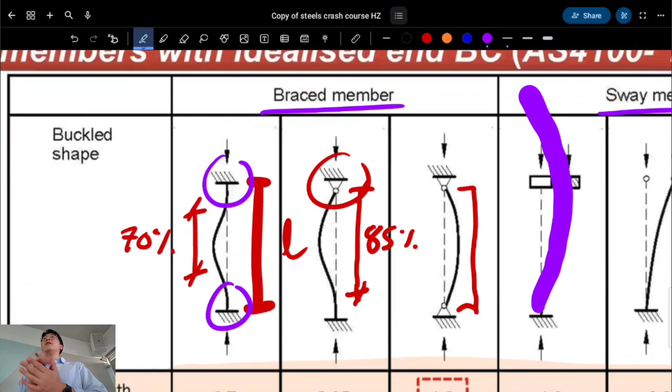Does anyone want to have a crack at—actually, this is an anecdote. At work, the first thing I've really been learning, because I just started last week, is about columns and designing columns. Do you guys know Scape? Maybe I shouldn't talk about this—okay, it's a building similar to Scape, Kingsford, on Anzac Parade, a residential building with a concrete slabs and columns system. What kind of effective length do you guys reckon they would consider for that type of building? Let me just quickly draw it—it's kind of like this shape.

You said 0.7, right? Yeah. So fixed and fixed on a braced member, kind of. Oh yeah. But firstly, do you reckon we would consider it as braced or sway for that kind of building? Sway. It would be sway based on the information I just told you, but they don't want it to be

a sway building, right? In real life, because a sway building is dangerous. You don't want to be in a building that sways around, right? So what they do is they put a concrete core in. That's usually like an elevator shaft with really thick concrete walls, and so it doesn't shake around. That's their way of essentially making it braced, right?

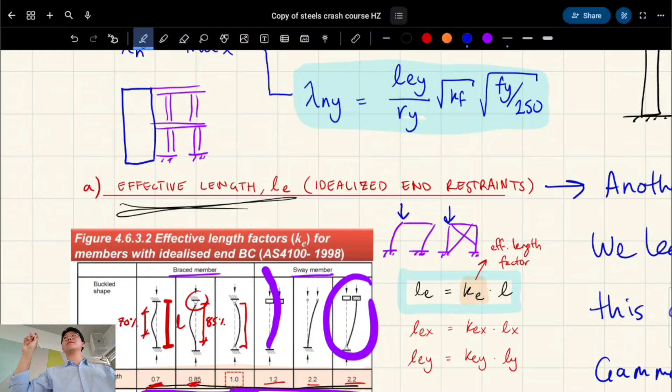Okay, so say it's braced, based on the end conditions, right? Like the end restraints. What do you think that building's K factor might be in the ballpark of? You're 0.85. Yeah, that's perfect. That's basically what we use. Yeah. So not because it's exactly like this apparatus, it's because it's somewhere in between being rigid and pinned. Because it really is based on like how thick the columns are and things like that.

Anyway, sorry, that was a bit of a tangent. But I hope that gets you thinking a little bit about how important the K factor is for buckling and everything to do with column design. Yeah. Okay.

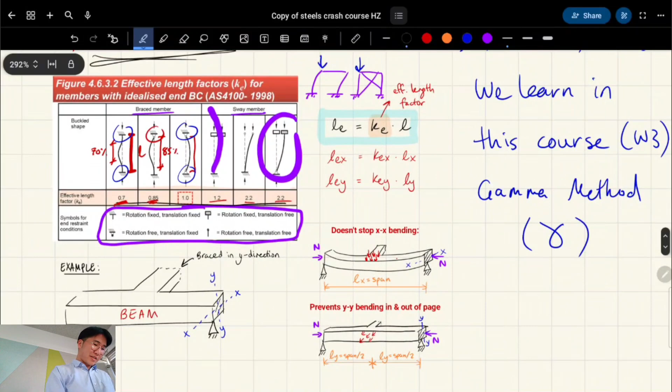There's one more thing I want to talk about, and that's the gamma method. Regarding effective length, this isn't the only way to calculate effective length. So that's the table. They dedicate an entire week of your course, week 3, just to the gamma method. Gamma method is kind of like what I said. It gets you considering the entire structure, right? And say you're designing a column within that structure. Gamma method asks what is the rigidity of the beams connecting your columns at the top and bottom, and it's a whole system approach for calculating K. It's just to calculate K, right?

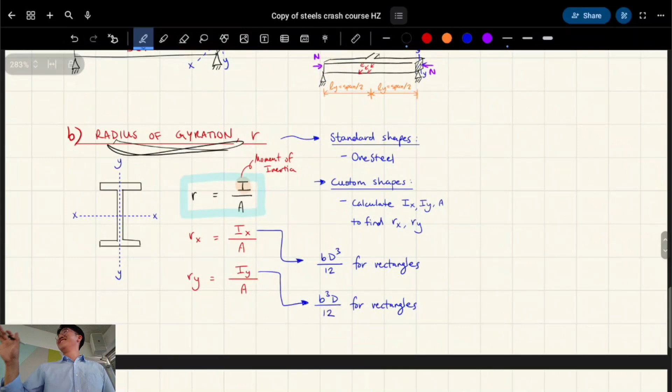Yeah, does that make sense? Because in real life, we can't just justify it based on simplified diagrams and whatever. Yeah. Okay. Any questions? Right. That's the gamma method basically. If you subscribe to my YouTube channel, you can see it in week 3's content, and you can see an example of it.

Okay, radius of gyration. I talked about it a little bit earlier. There's a formula for it. It's just the number that you use to find your modified slenderness ratio, essentially. That goes here. Yeah. Okay, any questions? That's pretty much all of compression.

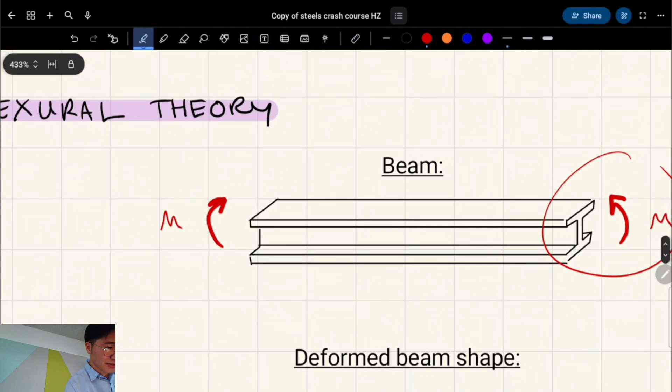Okay, so flexure. I kind of know what you're talking about: you said the web was potentially susceptible to buckling, I think. Oh no, and you were talking about the beam as if it was being loaded like that, right? Yeah. So before, we were talking about axial forces, right? Now, usually flexure isn't two perfect moments on the sides. Usually flexure is a result of shear forces, right? There are uniformly distributed loads and so on, and that induces a bending moment on your beam, right? And so the rules for buckling are a little bit different, okay?

Let's go back to engineers' beam theory. If you've done concrete, this is the most important topic in concrete. In steels, it's important, but it's somewhere in the middle of the course, and it's one of the harder topics, right? So, if I have my trusty bit of Play-Doh again, and I bend it like this, basically we have an uneven distribution of strain along the depth of our section, right? So some of these fibers are being compressed, some are being pulled apart.

Do you guys kind of know what I'm talking about when I say that? Yeah. Yes. Does everyone know what I'm saying when I say that? Because I remember the first time I heard that, I had no idea what that meant.

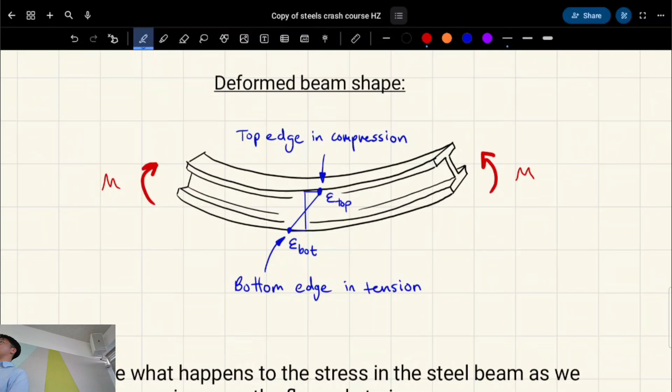Okay, so firstly, strain. Do you know how I said that strain is kind of like displacement? Strain is fairly easy to understand when we're talking about tension, for example. Strain is just how much is being pulled apart, right? But it gets really complicated when strain varies along the depth of a section. So for example, what I've drawn here: part of our beam is being pushed together and part of it is being pulled apart, right? So which parts are being pushed together, which parts are being pulled apart?

What happens if we have a cantilever element like this? It will deflect like this. Do you see how these elements are being pulled apart? Now the top is in tension and the bottom's being compressed.

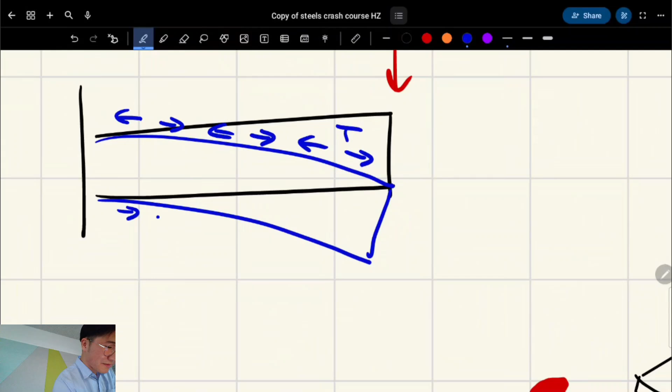But in this case, the top's being pushed together in compression and the bottom's being pulled apart in tension. This is like basic flexural theory, but you got to understand it for this part of the course.

Here's where it gets funky, and here's where you kind of have to have a good understanding of the steel material curve. Do you remember how we were talking about the steel material curve and it looked like this? Elastic, then flat, then the strain hardening part. Let's disregard the strain hardening part and just talk about when it yields. That's what's happening in this diagram, essentially.

So we're looking at different stages of stress here. Essentially we're straining the beam by bending it more and more. And what's happening with the material curve? It's becoming more and more plastic.

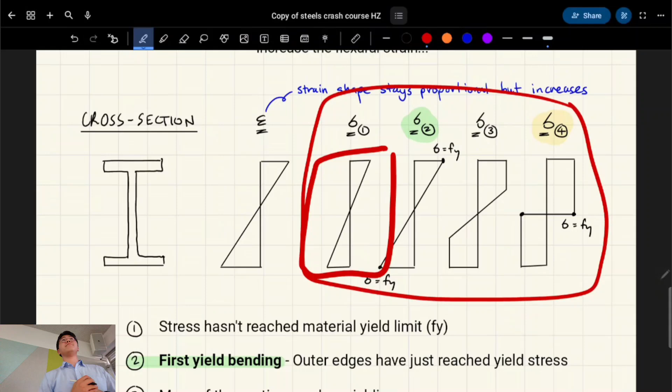Exactly, right? So what's happened in this very first one? It hasn't yielded yet. So on our material curve, we're like here or something. Okay, what happens here at stage 2? It's the yielding point, at the yielding strain.

That's what we call the first yield bending moment - maybe not moment, the point of first yield bending. What's happened here in this diagram?

Has the entire thing plateaued? No. Which parts have plateaued? Only the top and bottom part which have bent. Exactly, so these regions have plasticized.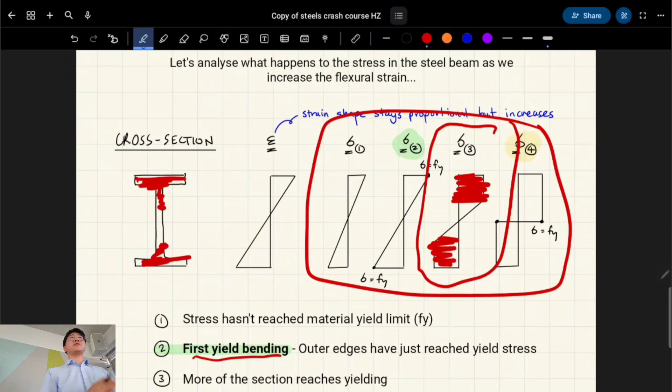That's kind of what we're looking at. So we're straining the beam more and more like this. And do you remember how we said the top is in tension and the bottom's in - oh sorry, other way around - the top is in compression and bottom's in tension? We were looking at the extreme fibers, the topmost and bottommost parts. But we have to consider the entire beam.

So those ones are the ones that yield first, the outermost parts, and then as you strain it more and more of it becomes yielded. So what's happened in this last one here? It becomes fully plastic. Exactly, so that's called plastic bending.

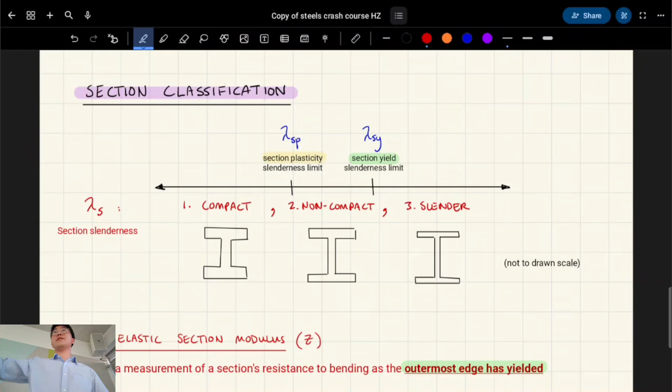Section classification - so here I've just drawn it. When we're talking about compact and slender sections, we're talking about the cross section, not necessarily the length to width ratio of the entire thing. So we're just talking about the section part at the moment.

As you can see, if you make the elements thicker, it becomes compact, and so it's not susceptible to local buckling. So the local buckling and global buckling concept apply for both flexure, which is what we're looking at now, and compression, which was the previous topic. It just applies throughout.

So back here, right? First yield bending is where the outermost fibers have yielded, just the outermost fibers.

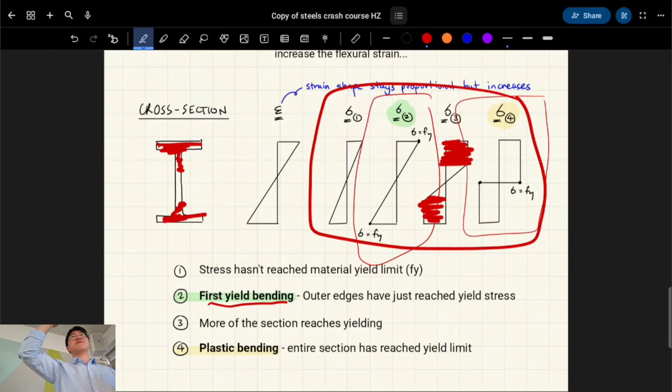So what we're looking for is we want to calculate Z. Z is our elastic section modulus.

And this is the way you're going to do it if you have a custom section. If you have a OneSteel product, you go to OneSteel, you find it on the table - it's easy. But for a custom section, it's harder. What you have to do is you kind of have to do this force analysis.

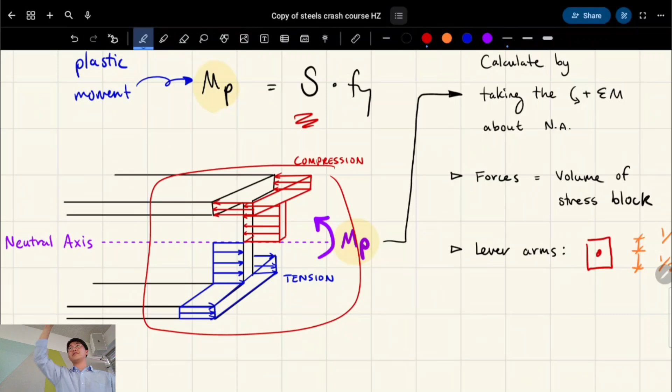And then you divide out the strength, basically. You do a similar thing for the plastic section modulus, but for this kind of arrangement, where the entire section has yielded, and you take the sum of the moments about the neutral axis. Sorry, there's too much to explain on that right now, so I'll just move on.

So for flexural design, it's very similar to compression design. You do the section check, and then you do the member check. The way you do it is a little different though.

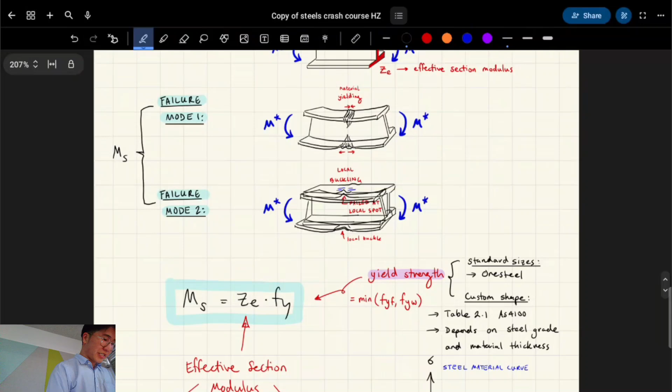So very similar to compression, we're gonna have either yielding or section buckling happening, which is gonna govern our section capacity. So we need our effective section modulus, which you can find in OneSteel, or if it's a custom shape, you're gonna need to do some pretty hard calcs. This is like assignment material, so I'll just give you an idea of what's going on, but it's too much to cover right now.

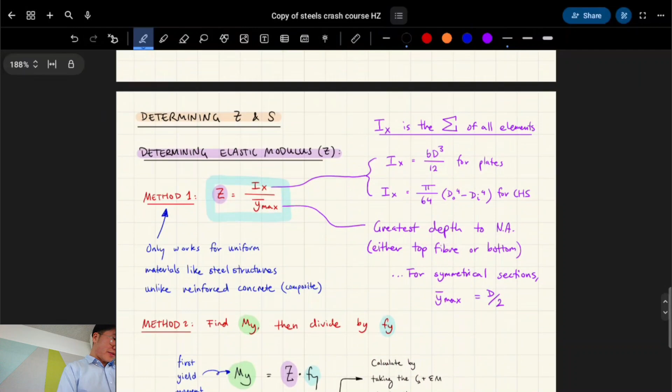Essentially, you have to break down the section into the parts which won't buckle, similar to what we did for compression. Find the ineffective area. You have to look on a bunch of tables and find the correct classifications, plug in a bunch of numbers, compare numbers, and determine the elastic modulus and the plastic modulus. That's another step, all in order to find this effective section modulus.

Because what we basically did is, consider an I-beam. Before, the first yield moment is where just the tips have yielded. That's one extreme. The other extreme is where the entire section has yielded. And at some point in between is where we consider our section to have failed in yielding. It's not when just the outermost fibers are yielded, and it's not when the entire thing is yielded. It's somewhere in between. That's what these calcs are about, and it's a function of how slender your elements are. That's what effective section modulus is talking about. Make sense? Okay, that's the aim.

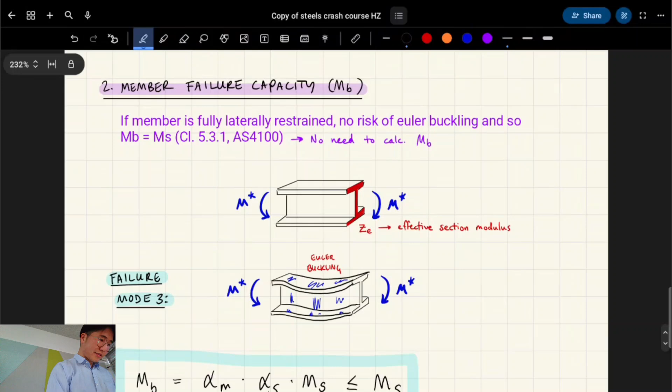There's a bunch of formulas. I won't have time to cover them. There's a lot of reading of the standards in this part. But that's how you do the section failure checks. The member failure checks are a little bit harder because it requires you to understand a lot more context on steel connections.

So there's something called restraints, which are how you prevent your member from buckling. If you have your I-beam, and at certain points you have a fin plate or whatever, attached to another member, that counts as a type of restraint, and there's a lot of details in the code about how things are restrained. Restraints act as little nodes for where buckling can't happen. So instead of before, where buckling could have happened along the entire beam, now that fixes the member in place, if it's fully restrained, and buckling can only happen within that span. Does that kind of make sense?

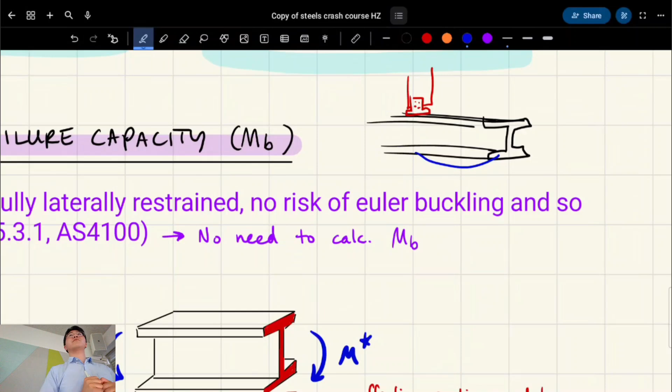So restraints are kind of like intermediate parts, which are not really supports. You don't consider them as structural supports, but parts which reduce the buckling length. There's a bunch of theory on it, we'll cover it later. And then there's a moment modification factor.

So the fastest way to explain this: you're taking the bending moment diagram of a beam, and based on how the bending moment is distributed, whether it's evenly distributed or there's certain parts which have high bending and low bending, it will also affect how susceptible your member is to Euler buckling. I don't know, that's the best I got.

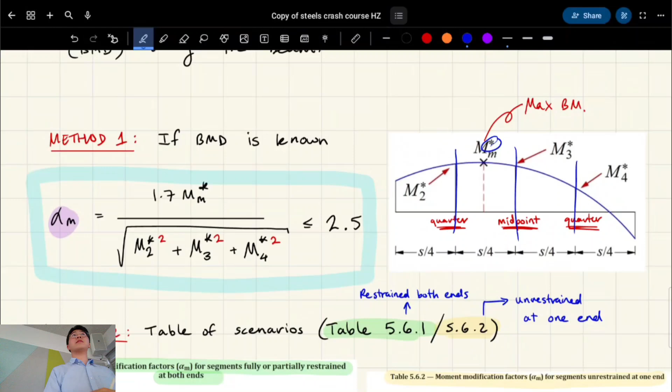Is it just like factoring the actual bending moment diagram? Oh, yeah, sorry. You have your bending moment diagram after you've factored the loads, that's where the star comes from. So you do all your G and Q factoring, and that bending moment diagram at certain intervals, the quarter points and the midpoint, that's what's gonna be plugged into your formula. It's basically about how even your distribution is. And the max is the M part.

Slenderness reduction factor is kind of similar to how we had our... gamma? No, that's lambda. Yeah, lambda n from compression. So it's to do with a slenderness ratio.

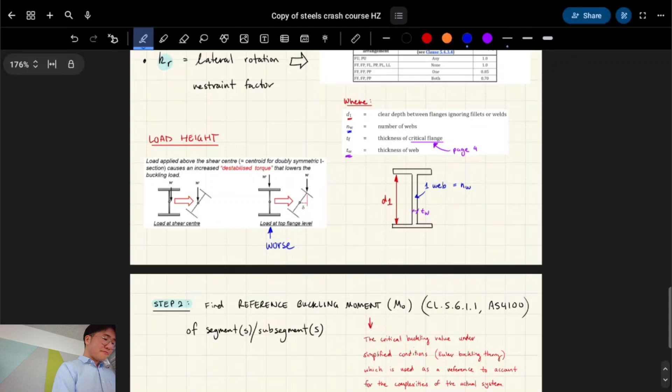Except like our effective length, instead of just being a single k factor L, there's a bunch of things that will affect it, including the restraints and stuff, like load types and a bunch of random things. That's what I'm saying, flexure is one of the hardest topics essentially because there's so many things to consider. Load height, like where the load is applied on your beam, things like that.

So another thing is the reference buckling moment. There's a lot of imperfections with this... how do I explain this? Okay, we'll get around to it, there's too much.

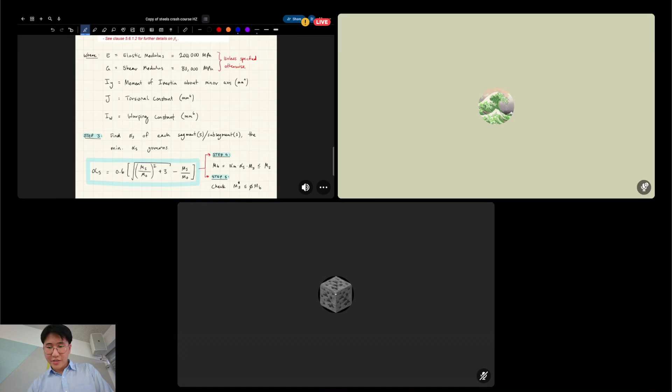Okay, that's the end of my crash course. But I'll quickly show you what my mate showed me on compression - on connections, I should say. I'll chuck these in the folder as well, but they're unverified. Not that I don't trust him, but I'm just saying they're unverified.

Essentially, there's going to be two types of connections you consider in this course. Connections, again, is just how two members are connected together. There's going to be bolts and welds. Has everyone heard of those? Yeah, so bolts, as you can imagine, are the easier of the two to install, and you consider them as single points on diagrams and stuff, just the centroid of where the bolt is.

The other one is welds. Have you guys seen welds in real life or whatever? I'll just pull up a picture. So welds look like this - they get a torch and a rod of metal, and then they melt it along. So essentially you consider it in this course as a straight line. In terms of finding the centroid of a bunch of welds, you consider them as straight lines.

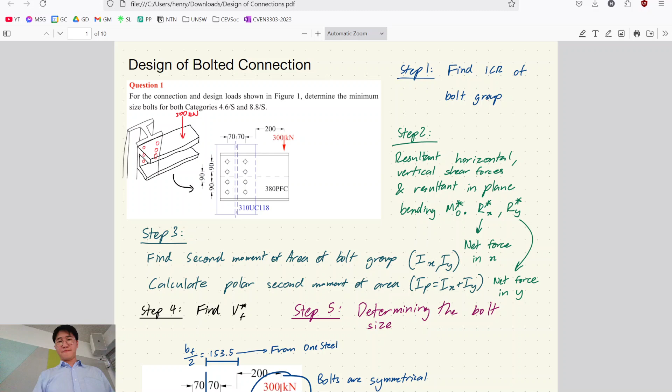I think they'll do bolts first and then welds. Isn't welding stronger? So welding, it's not like they don't weld - if it's done in a factory and it can be prefabricated, that's actually good, because then they just need the welder to do a bunch of different jobs in the factory. Or sometimes if it's a mass-produced thing, they have a machine weld it, and it's very precise.

But on site it's like the Wild West, so welding is very hard as well. If you're out on site welding something that's like 6 meters long, there's a good chance you're gonna fuck it up, basically. Welding is very strong though.

But for most assemblies, they'll try to bolt the elements together on site, because that just needs a power tool or something.

Okay, any questions? You know the part where you skipped, you said it's like 4 pages of steps for one of the parts. Let me find it. One sec, sliding. So that one, right? This one? Yeah.